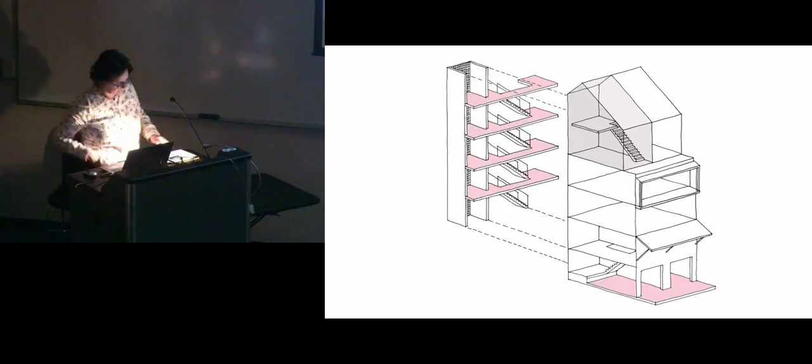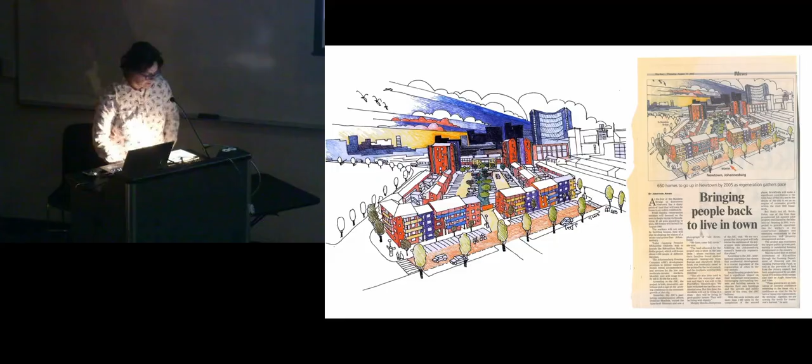Here, the inside of the courtyard, unfortunately still dominated by parking in our context. I think parking is the thing that kills housing in every context. And Brickfield's housing, our next project, integrated towers with walk-up units, creating a series of smaller spaces between buildings and a larger scaled neighborhood regeneration ambition.

Things that make housing work: a safe environment, places for children to play, a creche, a homework room for older children, places you can hold a meeting, a shop where you can buy essentials. Eyes on the courtyard and street. Here the same principles at a larger scale in Brickfield social housing. And in the end, architecture that becomes part of the background of the city.

Plenty, making room for more. The city is changing fast. It is incrementally densifying through a process of adding multiple units onto residential stands and multiple occupancies. And this has pushed, amongst other factors, affordability and a need to find a space to live. This is called backyarding and illustrates the intensity of the housing challenge.

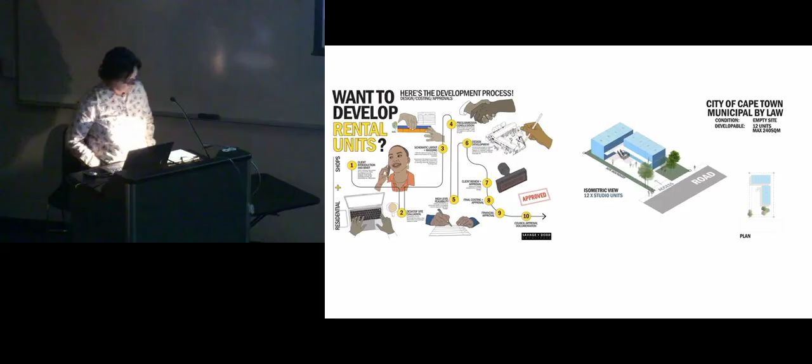And what we have been doing is working with an impact fund to develop a quick iterative design process, getting the basics right, that can provide streamlined professional services into a market that has not been served by architects. The market we are targeting are micro developers and housing entrepreneurs. And here we're taking our modular approach to housing design used in our social housing projects to develop a prototypical approach. We are working with the city to try and streamline approval processes to make them more efficient and affordable, transparent, and easy to understand.

Illustrating the potential to leverage existing infrastructure, making room for more. The possibility of plenty in a terrain of contradiction.

For a multitude of reasons, many buildings in the inner city of Johannesburg deteriorated in the early 2000s and became known as bad buildings. Sometimes they were vacant, sometimes occupied, sometimes hijacked. And in addition, in the post-apartheid era, corporate flight and deindustrialization left many inner city office and industrial buildings vacant. And these structures have become a valuable resource, material and spatial, for reuse, primarily as housing, with the potential to drive change at multiple scales and economies.

This shift transformed the city from a place of work to a place of living, enabling spatial transformation. And I see opportunity and challenge in tough environments. These are stories of recycling, resuscitating, and repurposing, exploiting the possibility of plenty in a terrain of contradiction.

After completing our first inner city new build social housing projects, we turned our attention to the decaying inner city housing stock, resuscitating, rehabilitating, while holding on to a vision of urban regeneration. Social housing companies and early investors were able to acquire buildings very cheaply.

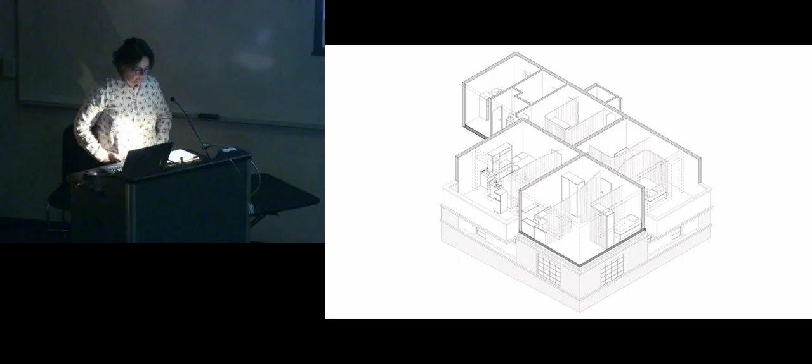In Bannon Court, the nature of multi-occupancy of apartment, room, and apartment as village is revealed. And it challenges how we might think about the design of housing units, how we might think about room in the city, how we might think about how people live in the city. And there are many advert walls where space is advertised, revealing the shifting space of home and what it means to have room in the city and the housing squeeze. And these insights inform an iterative, prototype-driven design process, responsive to the changing patterns of life.

In our housing adaptive reuse projects, we identified a series of what we term tactics for transformation that illustrate the approach and design tools used to form new hybrid typologies in pursuit of adaptive transformation of buildings and, by extension, urban fabric. These included joining buildings together, densifying through rooftop extensions to maximize the FAR, cutting out courtyards, and infill strategies. And all of these buildings were former office or industrial buildings converted to housing.

The impact of this practice of adaptation is changing the inner city into a more complex and dynamic mixed-use fabric, where both formal and informal processes contribute to a nuanced understanding of urban transformation and the diverse actors driving it. In this way, the built environment is reshaped building by building, gradually reconfiguring the functionality of the city itself. Perhaps best understood as a form of urban repair, a long-term process of addressing spatial inequality.

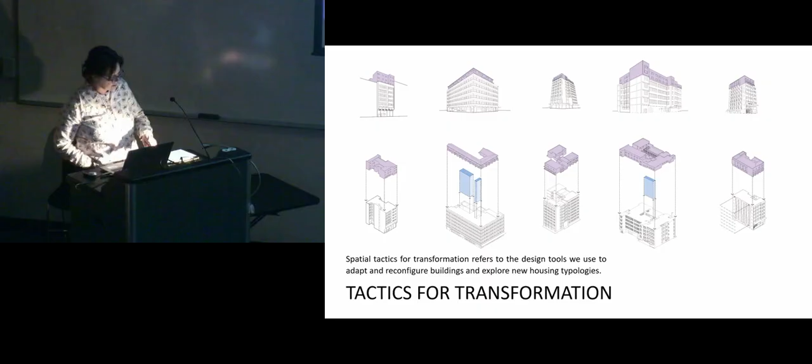Our strategy is to maximize the potential of the building envelope, working within the floor plate as a site and the roof as real estate. We create inner courtyards by extracting slab areas, while maximizing potential through rooftop additions. We are working from the inside out and are in fact engaged in the act of making space for more.

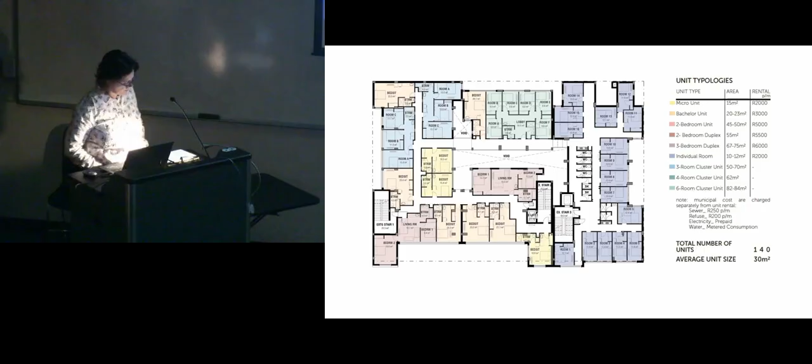The rooftop units. Working within an existing floor plan is sometimes like solving a big puzzle. This illustrates how a range of family configurations and affordability levels can be accommodated within a single building, from self-contained units to cluster units, which are 3 to 6 rooms sharing bathrooms and kitchens, and rooms with shared amenities.

The next project is a project called Pan-Africa House, and what I call a multifunctional hybrid. It's a new typology in the inner city of Johannesburg, driven by the migrant diaspora and Ethiopian and Somali communities that have set up buildings in this area and indeed changed buildings informally, and over a period of time they have changed this area of the city.

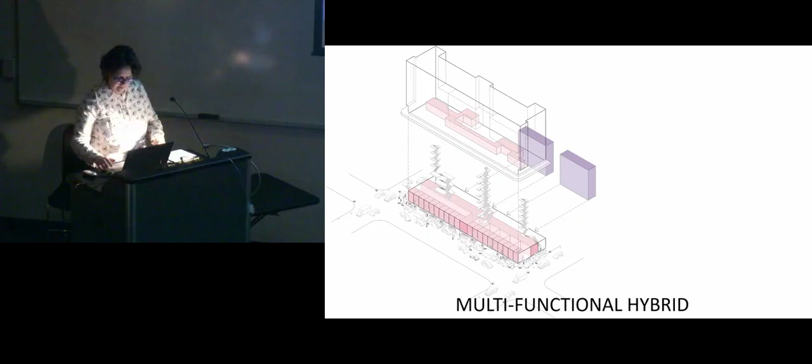And this project shows how the combination of a complex mixed-use program and manipulation of the building envelope through insertions and extractions results in a multifunctional hybrid. What do I mean by that? These slides show how the retail was reorientated, the original building on the right hand of the slide.

So the original shops were cut into small kiosks that faced the street, with an arcade cut through the building, which created an inner street. So the back of the shops now faced inwards to the arcade, with a new piece that was built in to face this arcade.

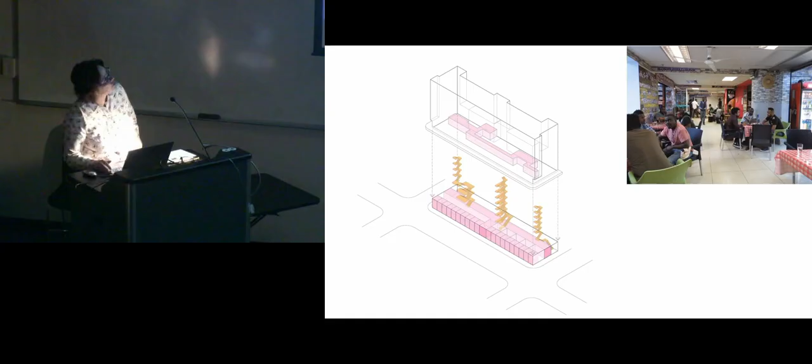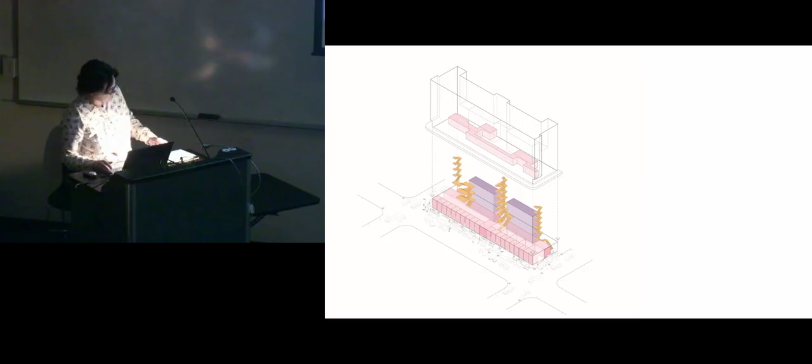And with new staircases connecting 3 floors of retail that themselves sometimes were inhabited by micro-retail, in this case an Ethiopian coffee shop. With the arcade repeated on the upper retail floors, accommodating shops and restaurants. The building's footprint is maximized by the additions in purple, with 5 floors converted to residential above.

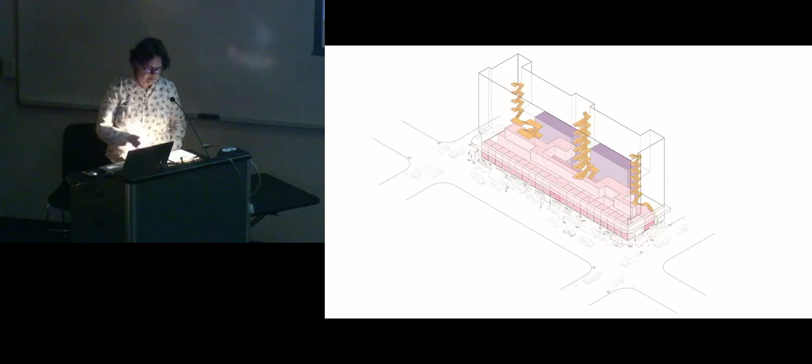And working on projects like these, where a building is subjected to major physical changes resulting in a completely new understanding of its function and place in the city, challenges us to think differently about established ways of working and thinking about how buildings function within the changing economies of the city. And we've spent the last 20 years or so reusing and repurposing buildings in the inner city of Johannesburg in new ways to serve new and different purposes. And thus we observe, reinterpret, repurpose, and insert back into the city.

But what are the preconditions for plenty? Do we merely set the stage, put in place what I call good bones that enable change over time? This is the adaptive reuse of a 1980s shopping center for affordable housing. It was no longer functional as a shopping center, but had some of the elements that would potentially make a nice place to live. Verandas, treed outdoor space.

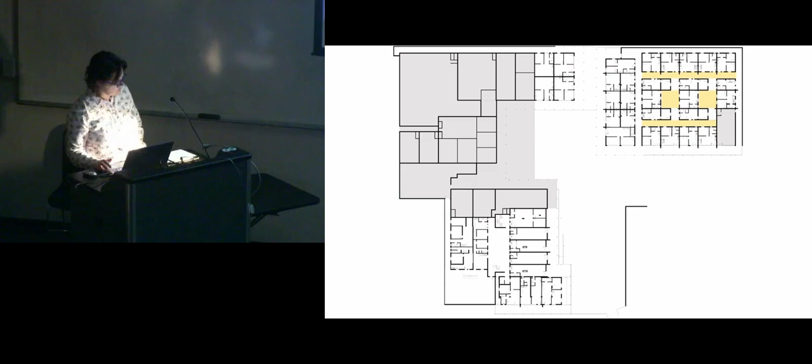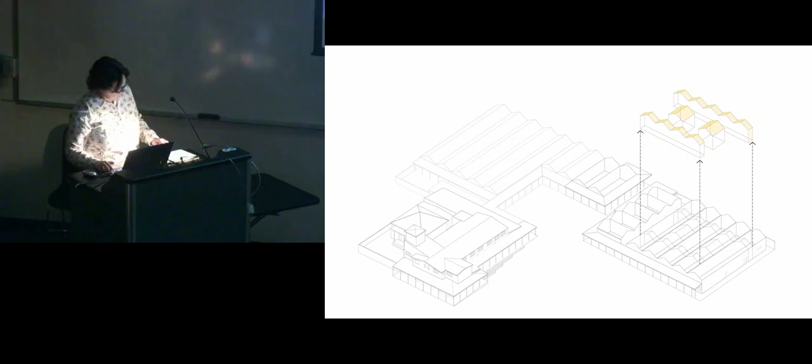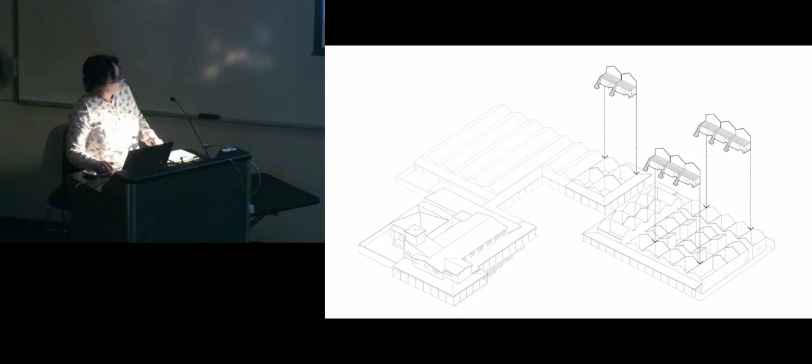And the existing deep space plan of the building presented both challenges and opportunities. An existing school in the grey area was left in place. Whilst the volumes of the existing spaces presented the opportunity for internal vertical optimization of the unit space, and for loft rooms, courtyards were cut into the existing building, creating a network of open space, the courtyards and the units in the former shops.

Here we aim to set the preconditions for future change. Knowing that we have a small budget, we make a unit that is flexible for future adaptation. And a happy client in our photo shoot.

I've spoken about a tactical approach of small moves related to finding opportunities for transformation and change. But I think that, particularly in our context, making space for plenty also has to do with a sense of publicness and awareness of the edges of space.

The last project that I'll show you is Sol Plaatje University. It's located in the Northern Cape. It's the largest province in our country with the smallest population. It's where diamonds were found in the 1870s. It's extremely dry with extreme temperatures, as in really very hot and really very cold. So where you would seek shade under a tree.

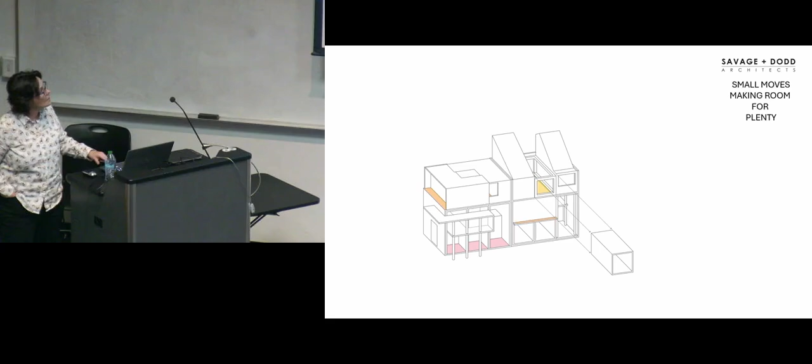But I think that's about the design and culture sort of embedded. But for me, I'm a hand drawer. So I'm a dinosaur. I mean, they give you a kind of a direction. You kind of define the way into it. I think it's all about using your brain and finding out.

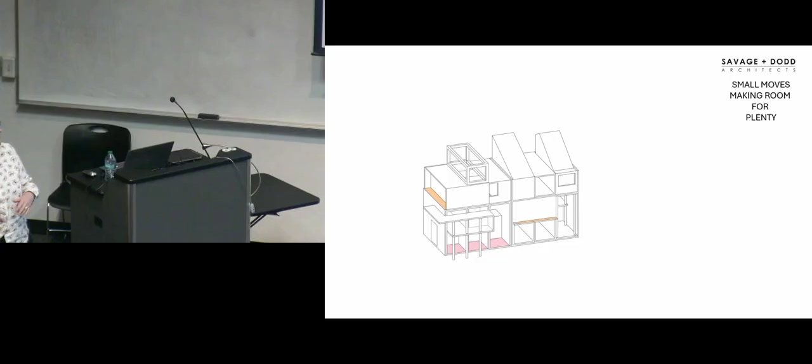So where we're actually stuck at the moment is we've got at least 500 buildings in the city of Johannesburg that are occupied or have been for the last 10 months, and that need to be reworked, and it's considered to be very complex. But that's the scale of disaster and opportunity that we have.

And then I guess all cities have this opportunity, because the fact of the matter is that older cities were set up with these buildings and they're no longer fit for purpose. They're no longer offices, they're no longer factories. You don't have sewing machines in your factories anymore. Amazon comes to town, they want

Pretend we're giving the lecture again.